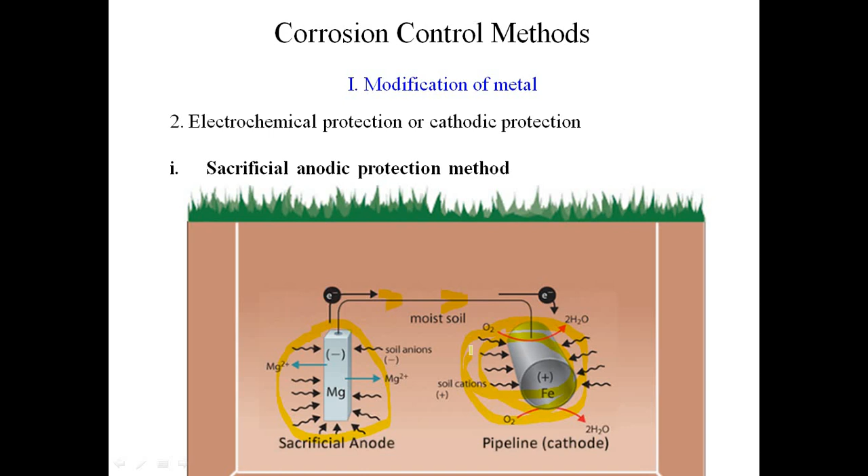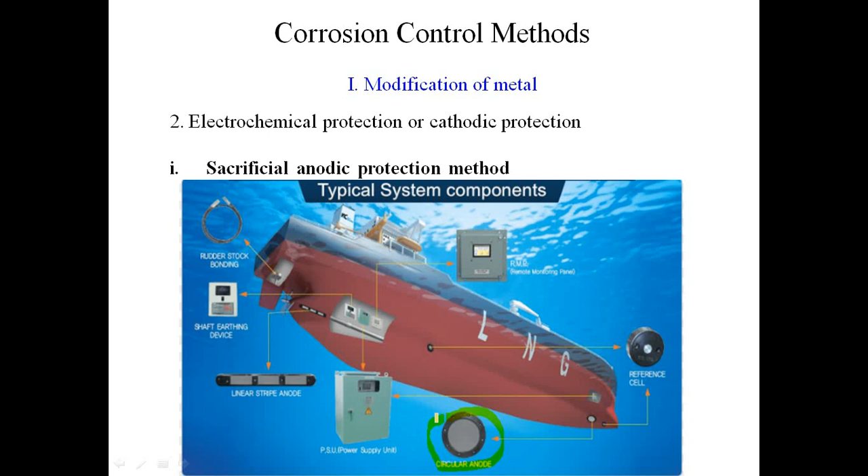And what is the natural corrosion process? Whenever there is a corrosion environment, electrons will flow from the metallic structure, so that electrons will be drawn out and corrosion products will be produced. So what they do in the impressed current cathodic protection method is that you will have a battery which will supply the electrons to your pipeline. That means the electrons will flow in the opposite direction. This is what I mean by the current applied opposite to the corrosion current, so that there won't be any necessity for your metal to lose electrons.

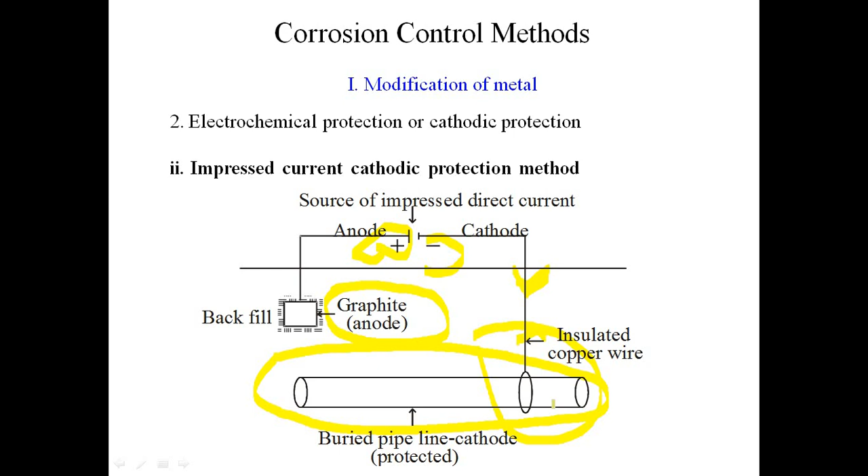So far we discussed how we can control corrosion by changing or modifying the property of the metal itself. There is another way, called modification of the environment. How can we modify the environment to avoid or control corrosion? The first one is de-aeration. When we talked about the mechanism of the corrosion process, we discussed that corrosion happens due to the interaction with the corrosive environment, the gases or the moisture available in the environment. So by removing the air from the interacting environment, you can avoid corrosion.

You can understand this from a simple example. Let's say again you have a boiler. In this boiler you have water to produce steam. If this water contains significant quantities of oxygen, it can easily interact with the metal surface and increase the corrosion rate. So if we have a technique to remove this dissolved oxygen from the water, you can reduce or nullify the interaction between the oxygen and the metal surface. This is what we are trying to do in the deaeration process.

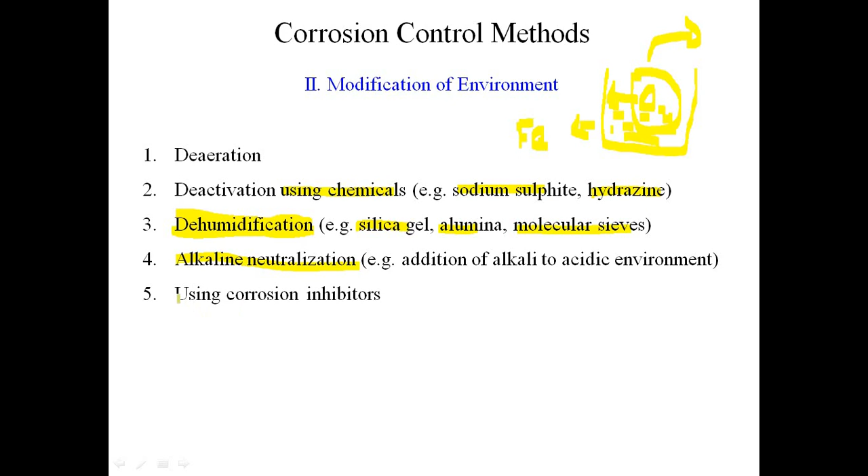Then the fifth topic, using corrosion inhibitors. To explain this one, let's again take the example of the boiler used for steam production.

When the steam is produced, they use water for the production of steam. We all know that water not only contains dissolved gases, it may also contain certain quantities of dissolved salts, right? These dissolved salts may form scales around the metallic surface or sometimes sludges during the steam production process. These sludges and scales will settle down or form around the metallic structure, which can act as a thermal

insulator. So whenever you increase the temperature to increase the production of steam, you will not get the sufficient quantities of steam that you expected or estimated. You will always get reduced quantities of steam because of the formation of this scale or the sludges. We discussed this scale and sludge formation in the first unit, water technology, so I am not going to

tell in detail. Okay, so to remove these sludges and scales, what the industries do is wash the metallic structure using some acidic solutions. This acidic solution will remove these sludges and scales, but you should remember that it can also interact with the metallic surface. That is the problem. So if we add a small quantity of chemical to this acidic solution so that it only removes the scales but does not interact with the metal surface, that is what we call corrosion inhibitors.

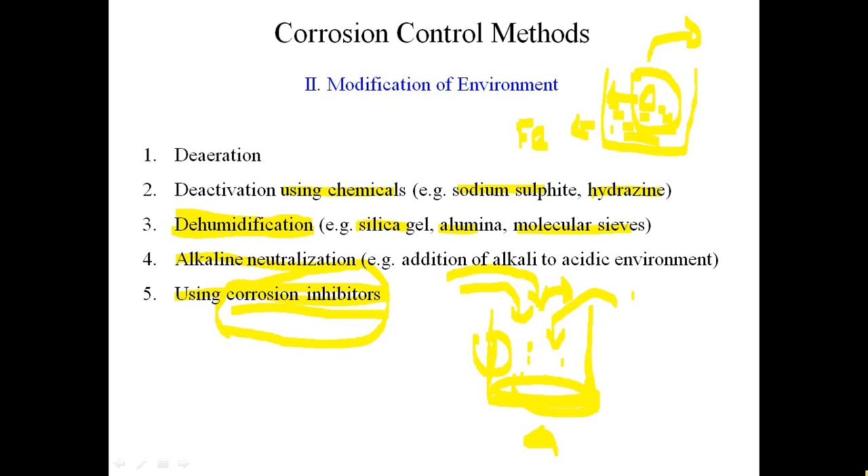Let's move to the next topic, protective coatings. There are two types: inorganic coating and organic coating. Inorganic coating, based on the processes, is again of two types: metallic coating and non-metallic coating. Example processes are electroplating and electroless plating, and non-metallic coatings are something like lamination. When we talk about organic coating, the famous one is paints. So in the rest of the video, we will discuss the paint, its constituents and some of its properties.

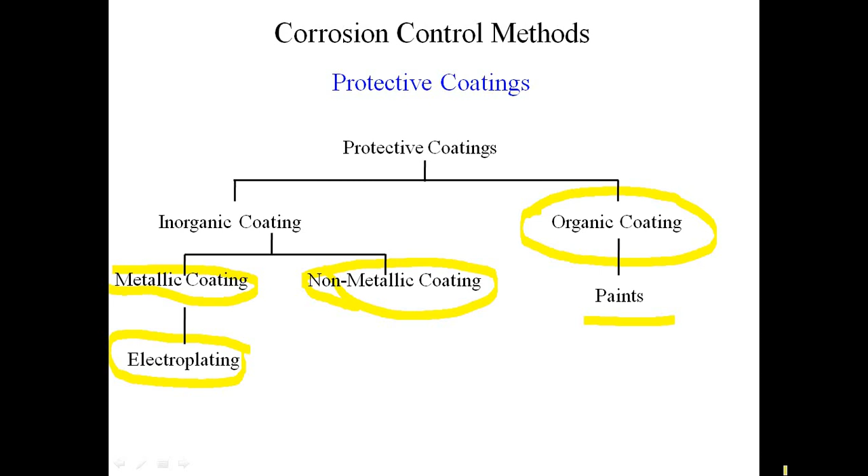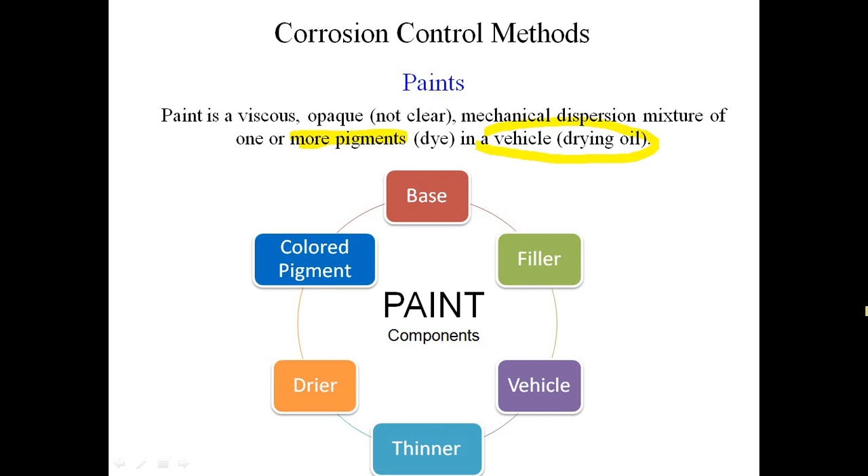So what is meant by a paint? A paint is a viscous, opaque solution, which is a mechanical dispersion mixture of one or more pigments in a vehicle. This is the basic definition. So paint is a mixture. It contains different components called base, fillers, vehicle, drier, or pigments. Pigment is included in the definition because it is the important component, and the vehicle is what carries the pigments. Let's see what are those components that make the paint a paint.

Constituents of paints. The most important constituent of paint is the color producing substance, called pigment. We don't always like to have a white background or white color. We would like different, mood-swinging colors. For that purpose you need pigment, which gives color to your paint. Here I have given one example. For white pigment, you may use a chemical called white lead, which is lead carbonate, lead hydroxide.

Okay, then the next constituent of paint is vehicle or drying oil. In fact, this is something non-volatile and having a property of forming films, because, as I said, pigments are something that gives color. But when we talk about the paint, if we paint the wall, it is supposed to stick on the wall. It should have some film forming ability. Otherwise, we will have a high intensity paint in some portion and low intensity paint at some portion because of the non-film forming property.

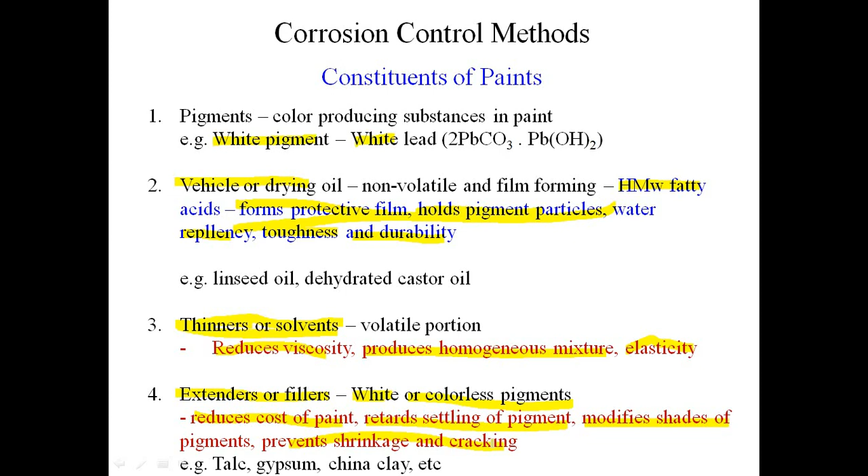It retards settling of the pigment. Okay, it gives homogeneity again, and it can be useful for modifying the shades of the pigments, and also they usually prevent the shrinkage or cracking of the paint. What is meant by shrinkage or cracking of the paint? We will discuss these terms with suitable pictures in the forthcoming slides. Okay, the best examples for extenders or fillers are talcum, gypsum and china clay.

The fifth constituent of a paint is called dryers. Dryers are the ones which actually accelerate the process of drying, because we are using different constituents for making up the paint. So when you use different components, it may increase the non-volatile portion. It may increase the possibility that the paint will not get dried very easily. So to increase the rate of drying, you may need to add certain reagents. They are called dryers. Usually they are oxygen carriers or catalysts. The examples are the metallic soaps, linoleates, resinates of cobalt, manganese and lead. Okay, these are the ones we use as dryers.

And the next constituent of paint is called plasticizers. Plasticizers actually provide plasticity and prevent cracking of the film. Okay, if your paint does not have plasticity, then you cannot actually paint on the walls. It will stick at a particular place like a gum, and it does not spread homogeneously throughout the wall, and there is a possibility for cracking of the film also. The most famous plasticizers used in paints are triphenyl phosphates and tricresyl phosphates.

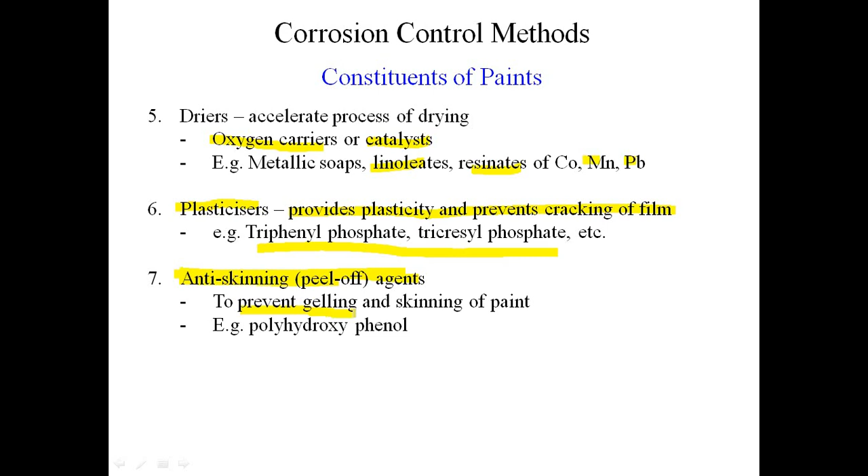And the last component of paint is anti-skinning agents, also known as peel-off agents. These are the ones that actually prevent gelling and skinning of the paint. What is meant by skinning? Skinning is nothing but peeling off. Peeling off of the paint is one property we actually do not like to have in our houses, because we invest significant money for painting the walls,

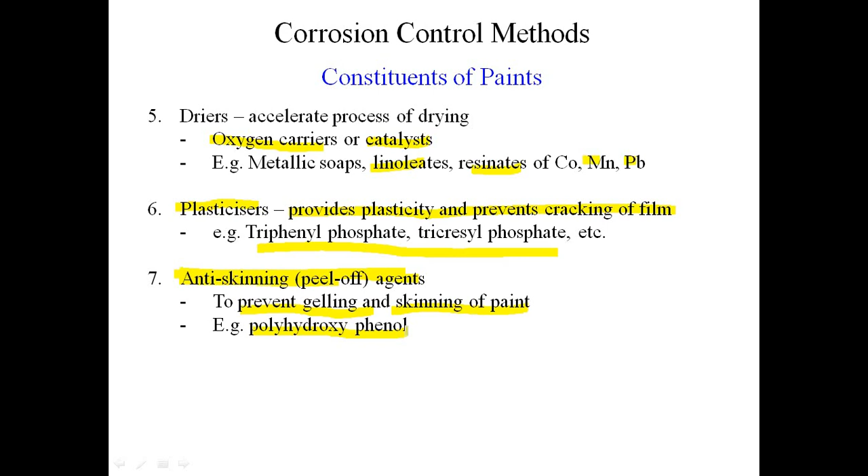and we would like to have the same color for a certain time. So if we see peeling off of the paint, it means that the quality of paint is not good. So we can say that the paint may not have the anti-peel off agent or anti-skinning agent. Okay, the best example for an anti-skinning agent is polyhydroxyphenol. It can actually reduce the peeling off effect in paints.

And yes, these are the failures of paints. Through these pictures you can understand the meaning of different terms. Chalking. Chalking is one effect we commonly observe in houses, on most of the walls painted with white colors.

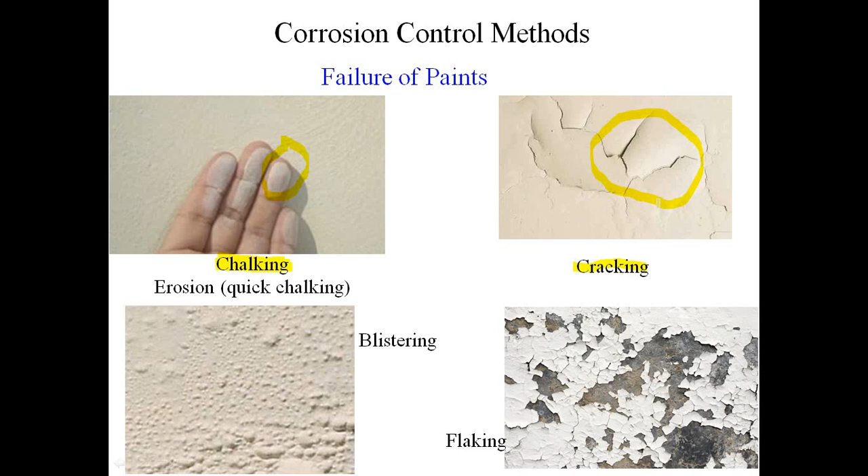If whenever you lean on the wall, or whenever you touch the wall, the paint comes off on your skin or your dresses, then that property is called the chalking property. And we talked about cracking. Cracking happens when your paint does not have a sufficient amount of anti-skinning agents, or if your paint does not have elasticity or plasticity. Cracking happens when there is an accumulation of the paint or a high concentration of the paint. So the highly concentrated portion will eventually shrink. When the shrinking happens, cracks form. This is what we call cracking.

And the next one is called blistering, something like a formation of small bubbles. In fact, we know paints have different constituents, like the ones for drying and the ones for film formation. So when we say your paint acts as a film, if it is not absorbed on the surface homogeneously, then there is a possibility of forming small bubbles, which we call blistering.

Then flaking. This we have also observed on so many walls. I don't want to mention which walls. It may be your house or it may be your hostels, and you can see this effect. Flaking: the paint will fall down as flakes, as small particles, and this is again due to the loss or non-availability of some of the constituents. If the paint contains suitable constituents, and if you select suitable constituents depending on the environment of your wall or the metallic surface, then you can avoid failures such as chalking, cracking or flaking.

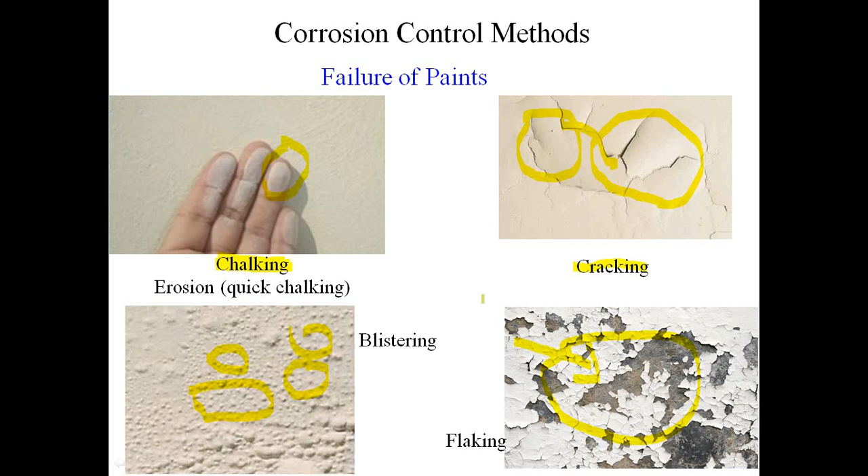Let's move to an interesting topic. So far we discussed corrosion control methods, and we understood that paints can protect metallic surfaces. There can also be failure of paints. Recently we have been seeing different advertisements that say that inside houses we have the most polluted air, and the paint you use can protect you from air pollution. And some people from the cine industry show some mechanism, saying that paints can act as a filter to remove the

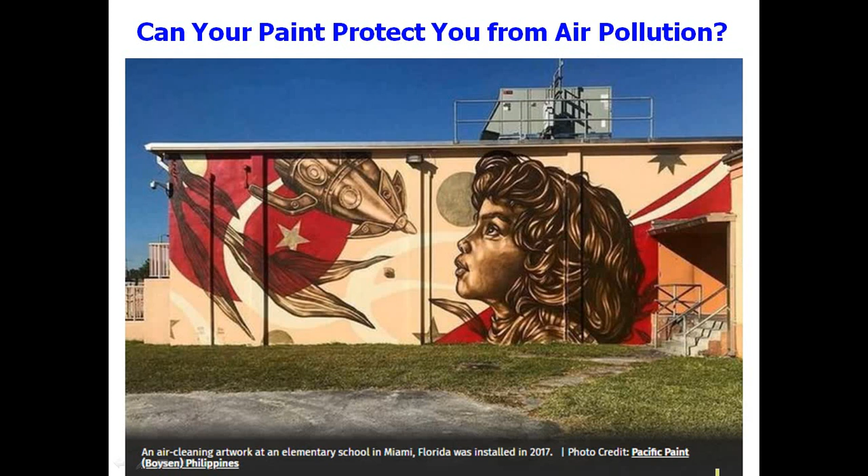pollutants from the air. The question is whether it is practically possible, because we understand that paints have different constituents, like fillers, dryers, pigments, anti-skinning agents. So when all these reagents are in the paint, if we add some chemical and say that chemical can remove air pollution, is it possible? Interestingly, several studies around the world say that the reagent you use in your paint to remove pollution from the air actually increases the pollution.

In fact, titanium oxide is commonly used in paints for reducing air pollution. We do not use such paints for general purposes. Some industries may have tried it, because titanium oxide is a known photocatalyst. Using simple sunlight, it can decompose whatever pollutants interact with the titanium oxide. So as I said, the titanium oxide degrades or decomposes the pollutants.

That means the decomposed pollutant again sticks to your wall, right? If you use titanium oxide in your paint, the pollutant will be broken down and will again stick to your wall. That means your wall gets increasingly contaminated, increasingly polluted. So the inclusion of such pollution-reducing agents does not actually reduce the pollution. This is one point I would like to mention.

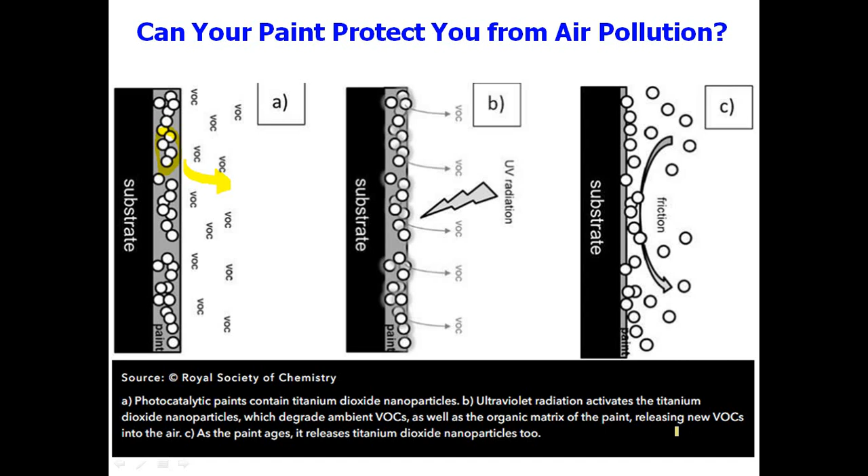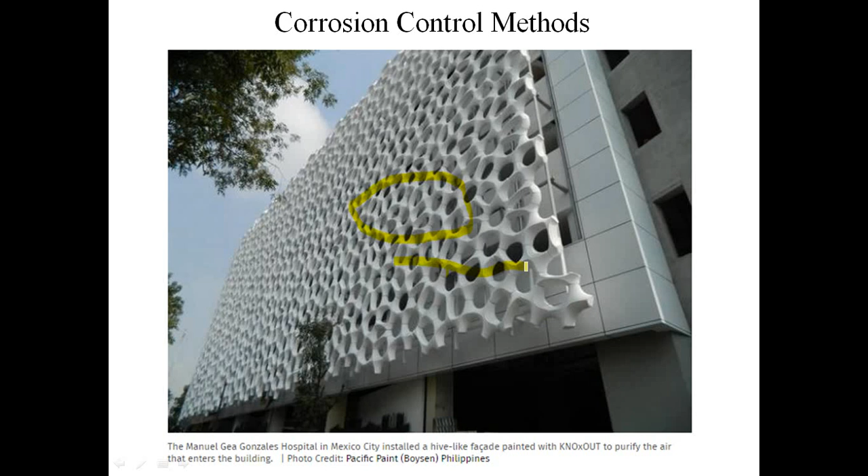And actually some of the industries tried something different. They used this kind of titanium oxide containing paints, and they made certain structures like this honeycomb structure or some other structures, so that they can absorb the pollutants. When we talk about filtration, maybe this one is in line with the filtration process, but again this kind of large structures will increase the cost of construction, and also I don't know how efficiently this kind of large structures can actually reduce the air pollution.

And in some of the advertisements we see that your paint contains activated charcoal. Actually, what is charcoal? It's burned wood, nothing but carbon, which contains porosity. Even in some of our houses we use this charcoal for removing the bad smell in the refrigerator. So how does this charcoal actually work? The charcoal works by absorbing the gases, irrespective of the nature of the chemical substance; they absorb the gases and store them inside the pores. I'm explaining in the simplest manner.

So when we use this charcoal in a paint, charcoal has pores which can absorb the contents of the immediate environment. If I add the charcoal to the paint, it already has about 7 constituents. These 7 constituents may get into the pores and the pores will be filled. That means your charcoal becomes inactive for any purpose. It is no more useful. It is nothing but dust. Am I right? So the pores of the charcoal are filled with other constituents of the paint, so it cannot act further. So whatever they say in the advertisements actually does not work practically.

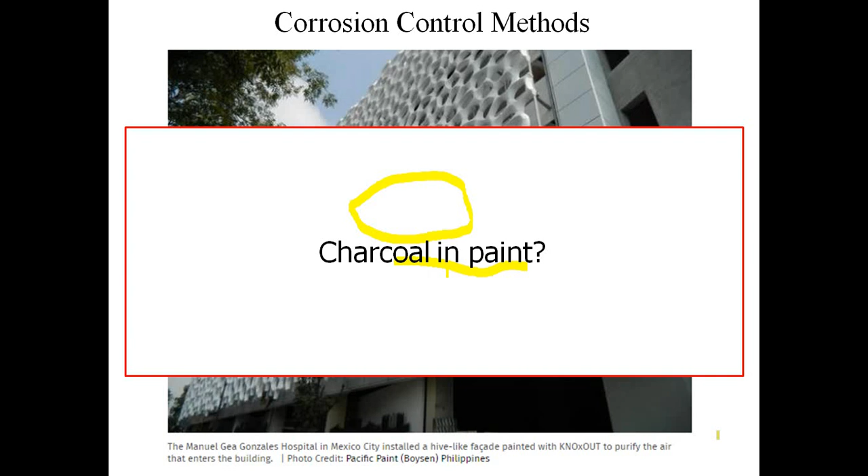And the summary of this video is that the corrosion process cannot be stopped but can be controlled using 2 measures. One is by modifying the metal and the other one is by modifying the environment. When we talk about modification of the metal, you can change the property of the metal by making it an alloy, or by supplying it with external electrons from the sacrificial anode, or by supplying electrons from a battery by means of the impressed current method.

In the other way, by modifying the environment, you can remove gases such as oxygen or carbon dioxide, de-aeration of the environment, or you may dehumidify the environment, or you can apply some inhibitors to control the corrosion. And also you can apply paints that have suitable constituents or suitable properties, so that you can protect the metal surface. This is the way you can control corrosion.